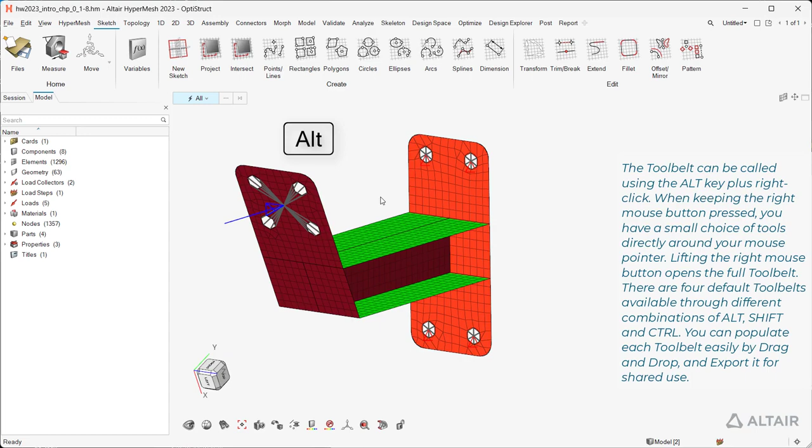The tool belt can be called using the Alt key plus right click. When keeping the right mouse button pressed, you have a small choice of tools directly around your mouse pointer. Lifting the right mouse button opens the full tool belt.

There are 4 default tool belts available through different combinations of Alt, Shift, and Control. You can populate each tool belt easily by drag and drop, and export it for shared use.

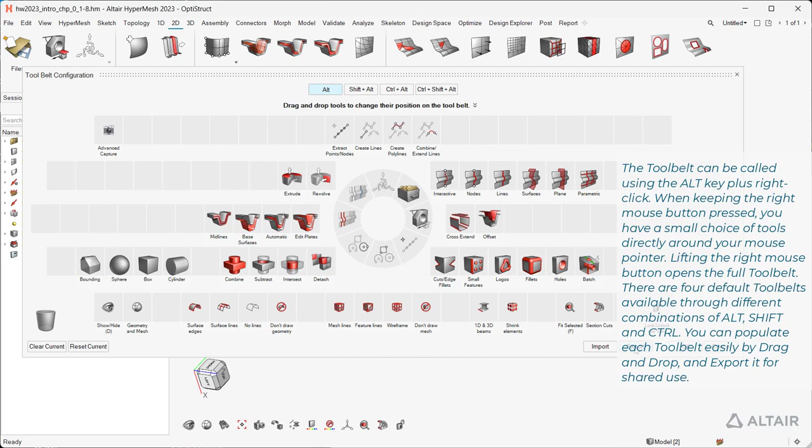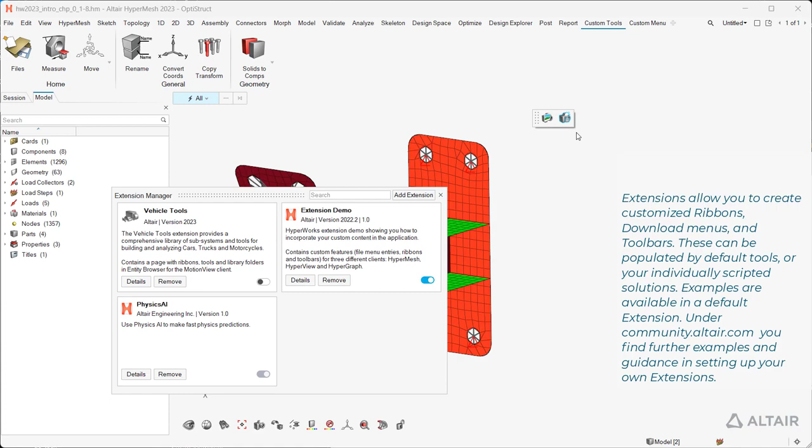Extensions allow you to create customized ribbons, download menus, and toolbars. These can be populated by default tools, or your individually scripted solutions. Examples are available in a default extension. Under community.altair.com you find further examples and guidance in setting up your own extensions.

Ctrl+I, Ctrl+E and Ctrl+O are shortcuts to open the import, the export and the open dialogues. Ctrl+S saves your current model file.

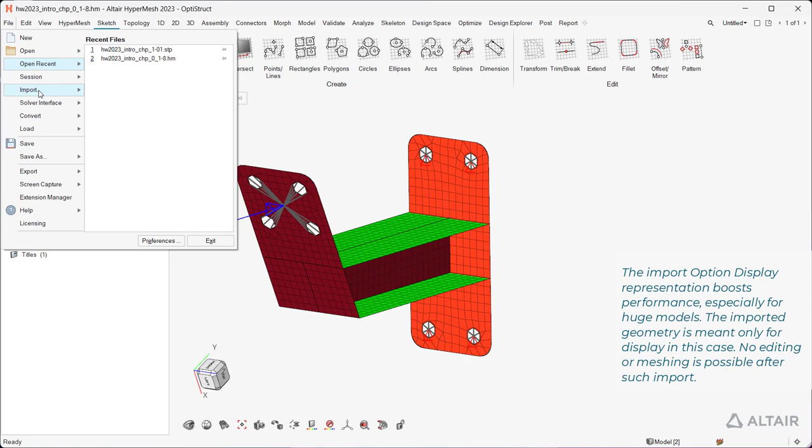The import option display representation boosts performance, especially for huge models. The imported geometry is meant only for display in this case. No editing or meshing is possible after such import.

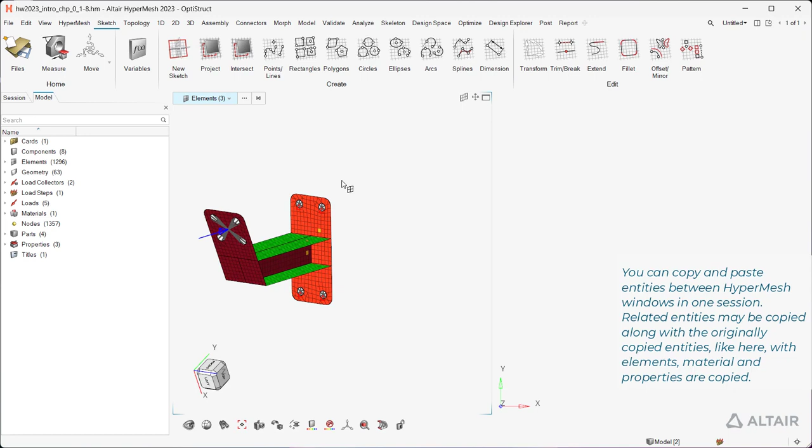You can copy and paste entities between HyperMesh windows in one session. Related entities may be copied along with the originally copied entities, like here, with elements, material and properties are copied.

A PDF is available listing keyboard shortcuts and mouse controls. Search the help for keyboard shortcuts and mouse controls.

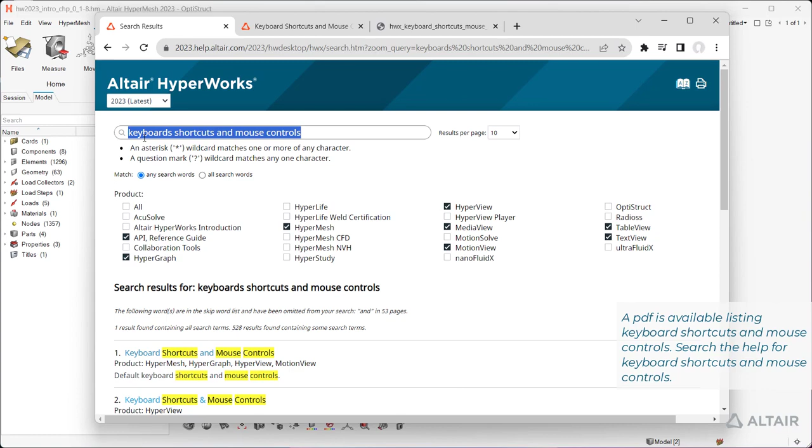Under View, Keyboard Shortcuts, you can customize the keyboard settings.

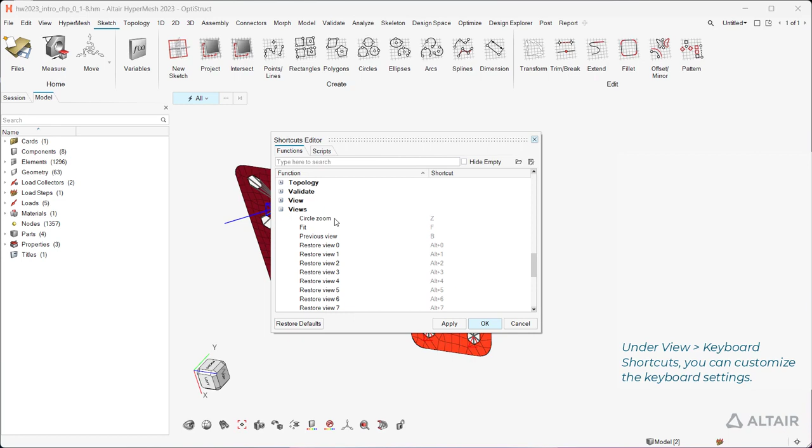Find Entities allows to find attached entities. You can click on one element to display its adjacent elements, or hit the play button to display elements adjacent to all displayed elements.

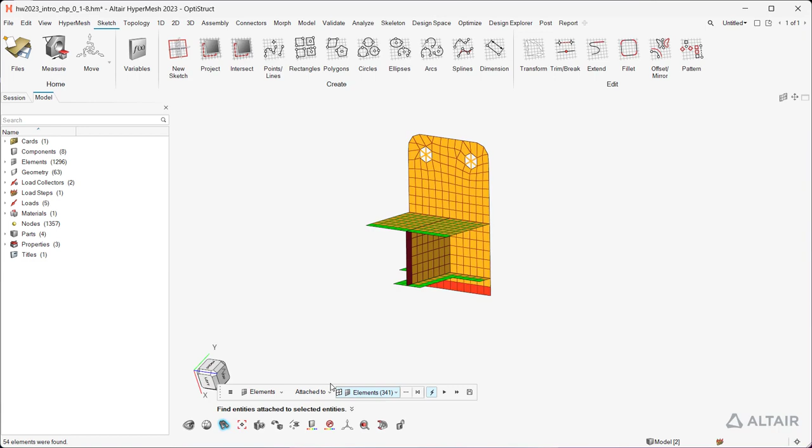The option Nearby can bring multiple types of entities back to display, or isolate the displayed entities, based on their proximity to a selected location.

The D key will open the Show Hide tool. Per default, a left click is hiding components. With Shift and left click you can show components from the off. Window selection works also.

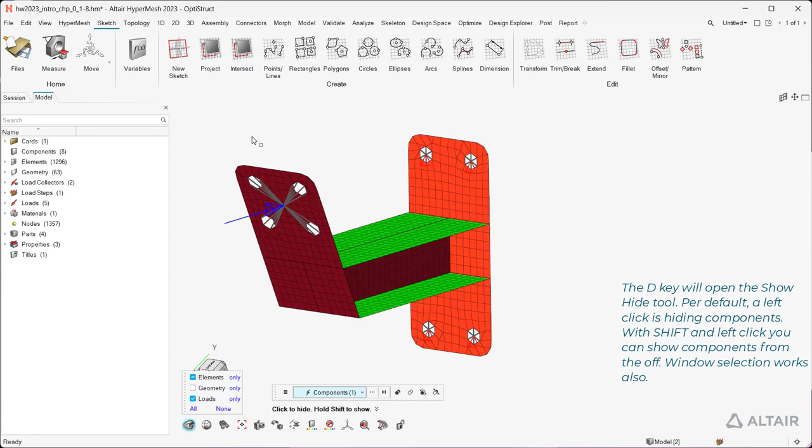Hitting Ctrl plus a number key will save the current view. You can call it by hitting Alt and the number key.

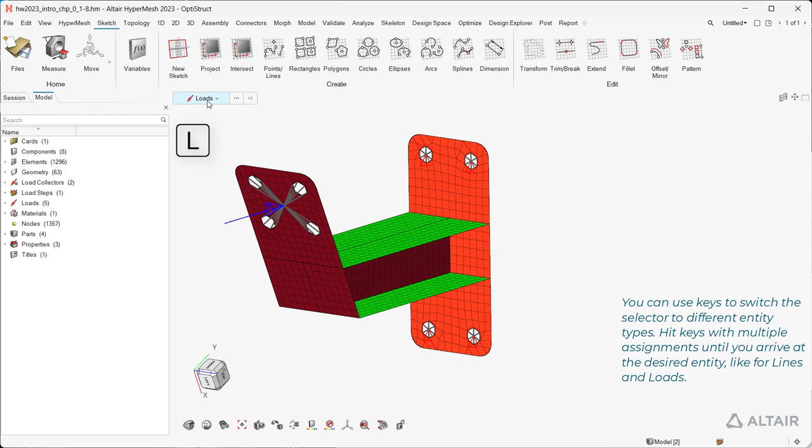You can use keys to switch the selector to different entity types. Hit keys with multiple assignments until you arrive at the desired entity, like for lines and loads. The dot key opens the advanced selection menu.

Interesting selection methods include elements by path, where you can close the path by middle mouse click.

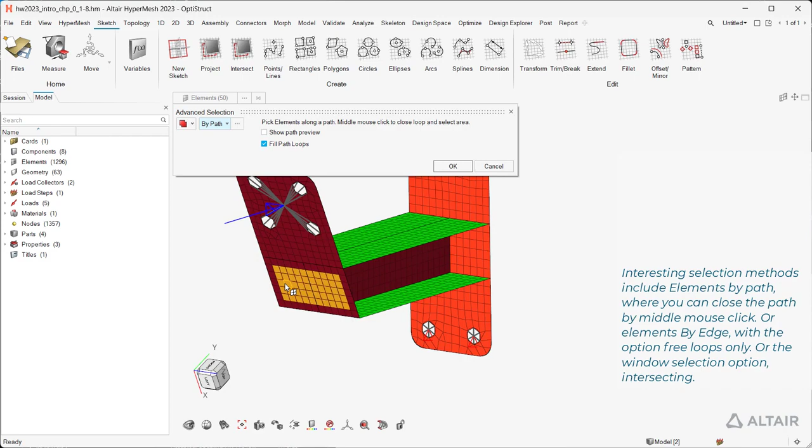Or elements by edge, with the option Free Loops Only.

Or the window selection option, Intersecting.

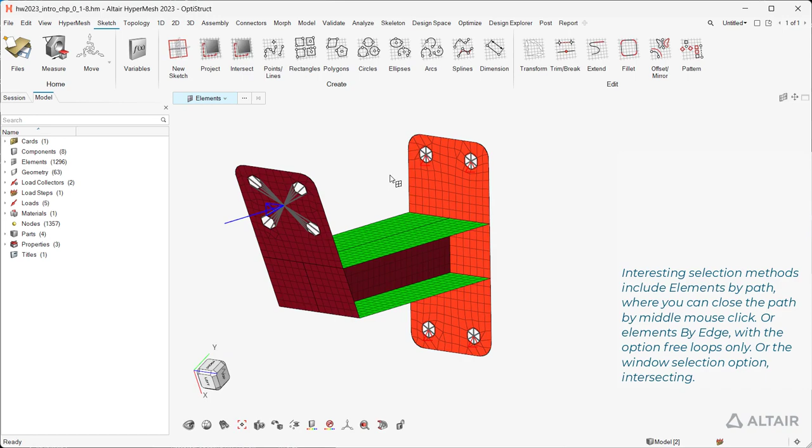Similar does select all elements of the currently selected type. This works also for surfaces.

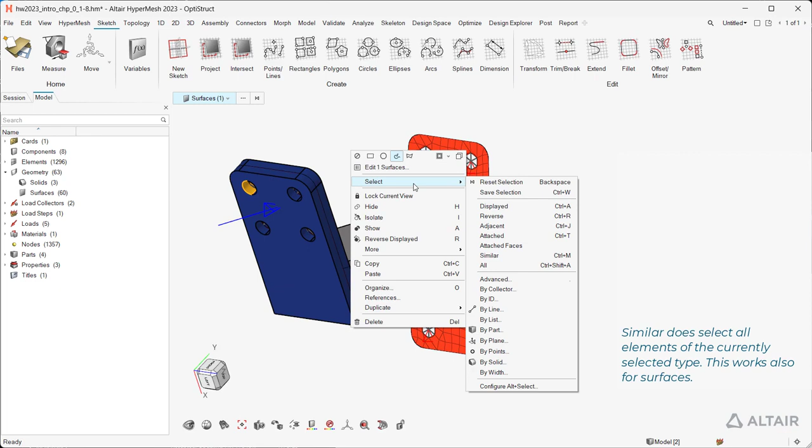Holding the Alt key while left-clicking during element selection is a shortcut for the selection type, by face. The Alt key for selection is customizable from the right-click menu.

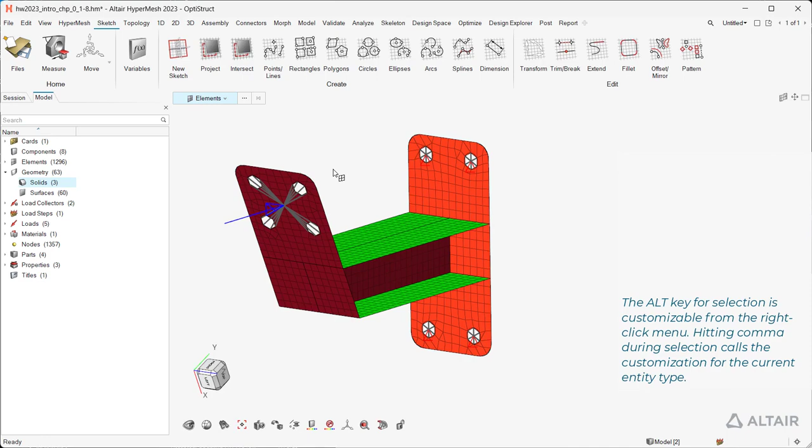Hitting comma during selection calls the customization for the current entity type.

Control plus the Z key returns to the previous selection. Also, in case you cleared your selection, maybe by accident, like for example through a left click in the background.

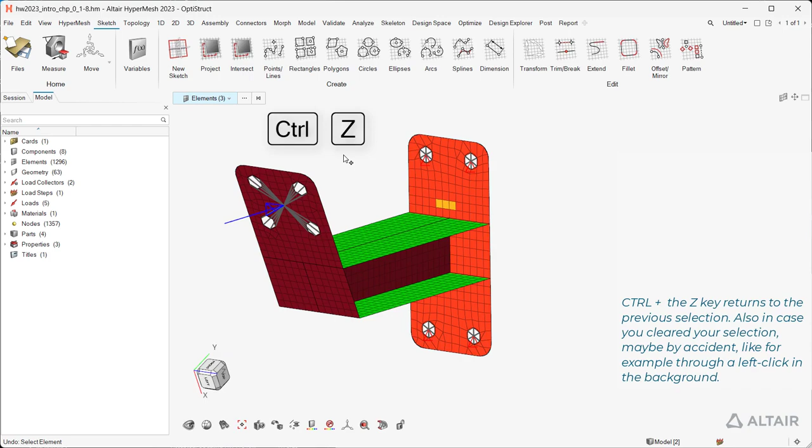The search tool helps finding tools and create solver keywords.

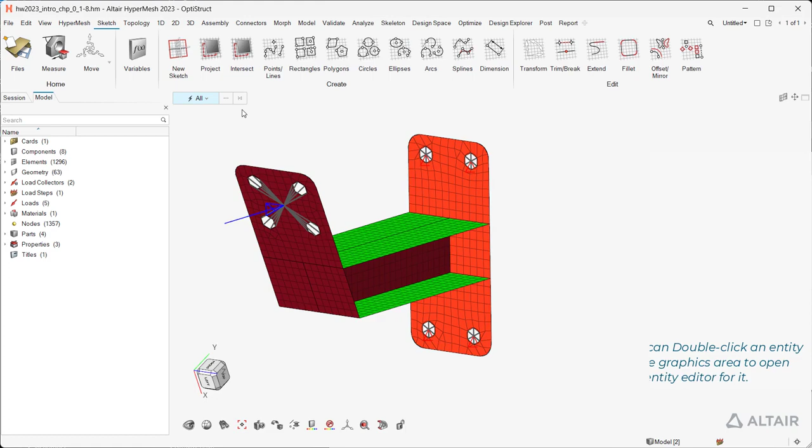You can double-click an entity in the graphics area to open the entity editor for it.

In entity browsers, the filter offers each column as filter criterion and lists per criterion the values available in the model. Boolean definitions allow multiple criteria definitions to be used.

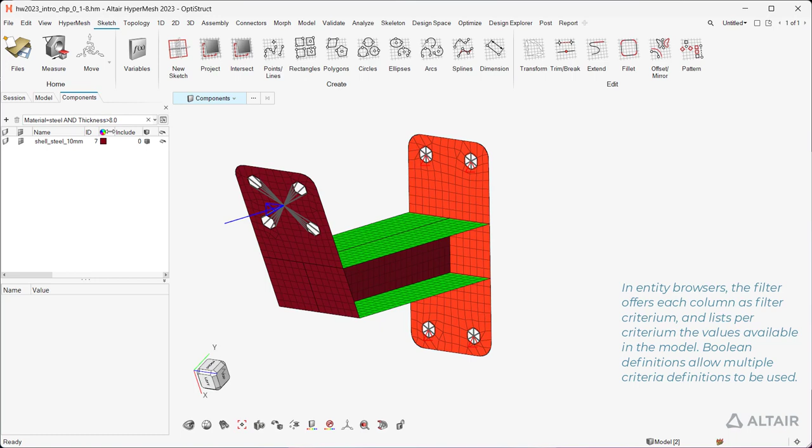Predefined filters exist also for the current component, for the displayed components, or the currently selected components.

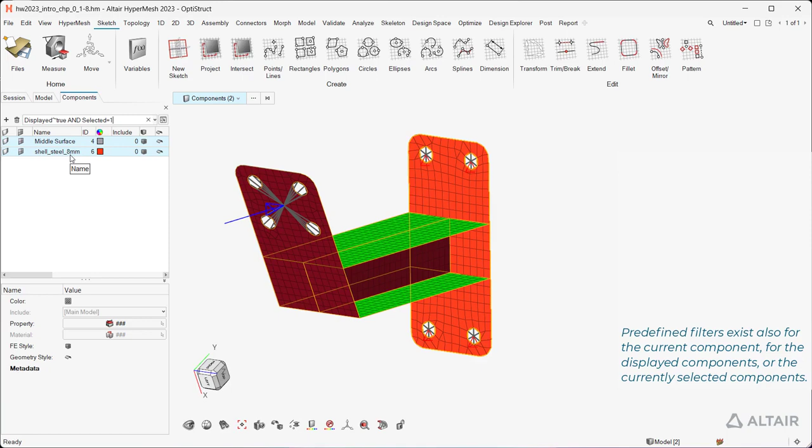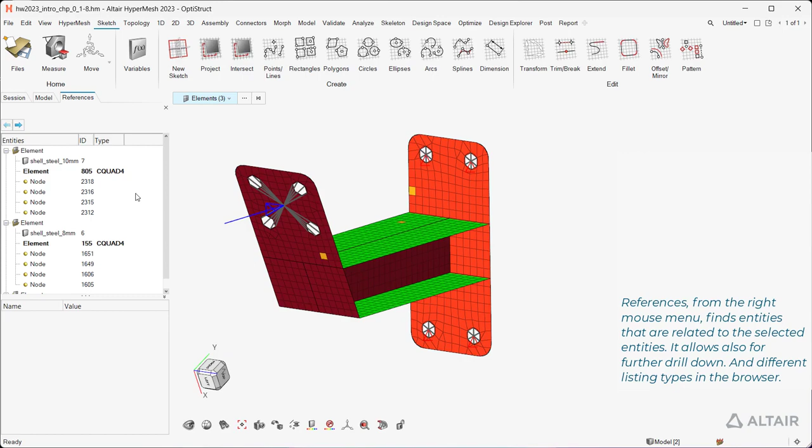References, from the right mouse menu, finds entities that are related to the selected entities. It allows also for further drill down and different listing types in the browser.

This was the compact basic tips and tricks collection for handling HyperWorks 2023. Additional collections of tips and tricks may be made available soon.